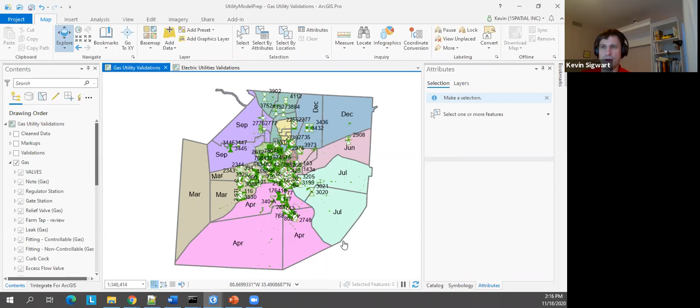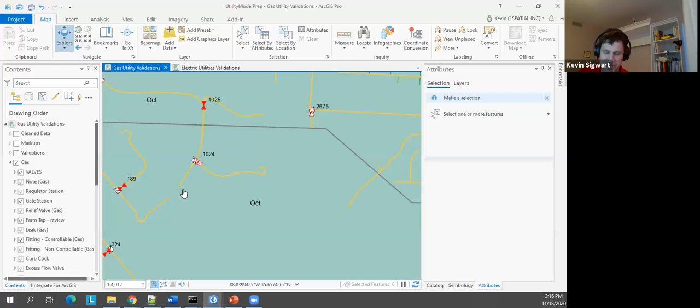So here I have a gas utility network, let's just zoom in so we can see what we're dealing with. And in here we have a series of gas lines and so forth. What we're finding is that this is symbolized based off of a set of interesting symbology that may be good for visualizing the data itself, but not very good for doing validation. So I'm going to flip this over to something that's a little easier to understand when we're doing the validation checks.

And what we're going to do is run a series of validation checks. Some of the checks we're going to check for is proper connectivity. We're going to look if there's any kinks in a network. We're going to make sure that our service lines are actually feeding out to those service points, and make sure that the relationship is that the service point is connected to the end of the line - not just that it's connected to the line, but connected to the very end of the line. So we can already see over here, here's an example where the service line is not connected to the meter itself.

So we're going to run it through a series of validation checks, and to do that, we're going to leverage the 1Integrate technology. So now I'm going to flip over to 1Integrate.

And here is our 1Integrate product. As I said, this is a server-based product that can either be installed on-prem or hosted in a cloud environment. The way that it works is you have an interface for building rules and running rules. It also has a REST API, so a lot of this occurs through automated processes - things kick it off and it just runs through.

So you may not necessarily work with the interface itself directly, except when you're just building out what types of validation checks you want to run. But all this can be also automated through a series using the REST API.

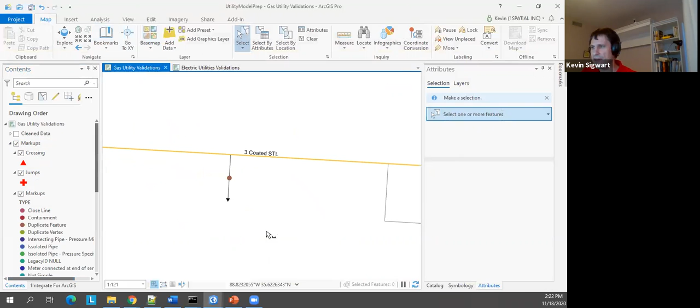If we come over here, here's where we're flagging this as a duplicate feature. I have 2 service lines that are the same geometry. Also, it has the same attribution too, so we can make it smarter than just the same geometry. We can also look at the attribution too.

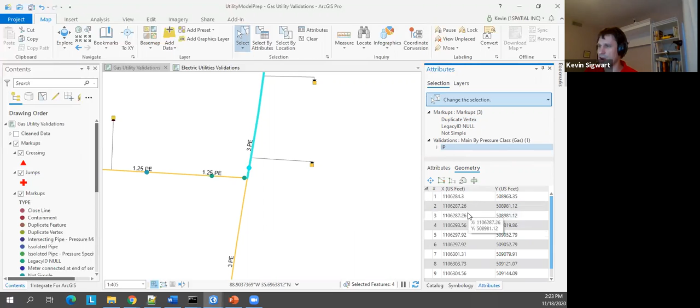Here we have an example where we have a duplicate vertice. So if I come in here and look at this geometry, I'm sure, oh, here we go, right here. Here's 2 vertices that are duplicate vertices.

We have spikes and kickbacks. I see this all over in GIS data, where there's these kickbacks and spikes and weird issues with the data as it's trying to maintain connectivity.

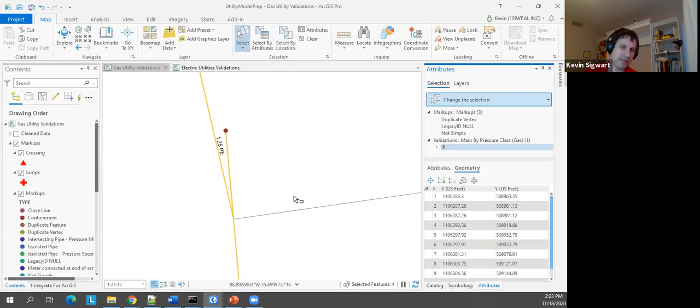This is going to wreak havoc if you have any sort of model, if you're trying to feed this into modeling software. Here's another example where we have a spike. And then here's just one other example where there's this weird spike occurring.

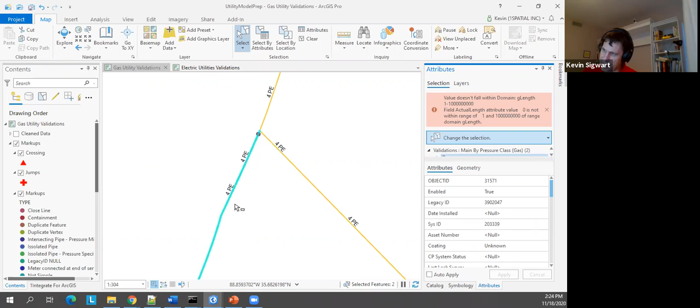We have features contained in other features. Here's another example. Okay, here I have two features. One feature goes to about here, and the other feature extends out, so one feature is contained in another feature.

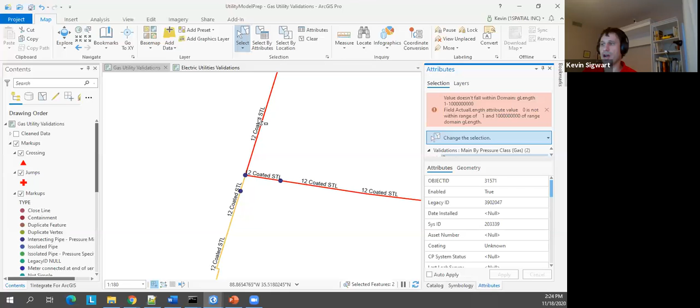Proper connectivity: here I have an undershoot, and here's another example of an undershoot. I also have pressure mismatches between connected pipes. Here we have an isolated pipe, because I'm looking at not just is the pipe connected to another pipeline, but is it connected to a pipe with the same pressure? In this case there's a mismatch, so it's a pipe that's isolated by itself.

Making sure we don't have orphan meters. So here's some orphan meters where it's not connected. I already mentioned this before, where it's not connected to the end of the line.

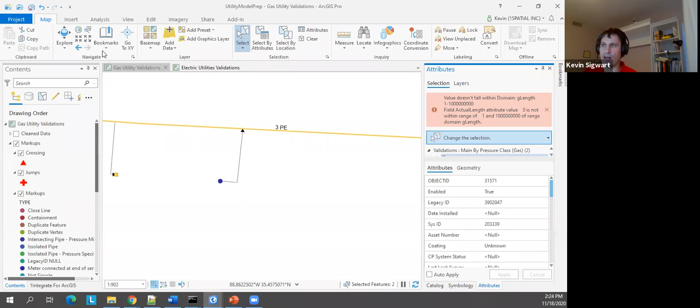Lastly, one of the other validation checks we've done is to check where my service lines cross over my pipes where they don't have a jump in them. Jumps are great when you're dealing with a paper map per se, but if you're trying to run this through some sort of analytic software, you're going to need to be able to handle it. So you need to identify where we have crossings where there is a jump, so it's not actually connected.

So maybe you want to change the Z value or something like that so they're not actually connected, versus where you have ones that are just crossing over. In the rules, we can write business rules to determine whether or not it's crossing with a jump. So here we have a cross with a jump, and this one is a straight line, so it's crossing over but it's not a jump. We can write some pretty complex business rules.

All of that was done, all those validations across this entire data set, were run in that short amount of time. But beyond just doing validation checks, we can also automate the cleanup.

So I'm going to go ahead and fire this off. Now we have business rules running that are going to do the automated cleanup. Just like we had the essential geometry checks, we have essential geometry fix-ups that can remove duplicate features, fix connectivity, things like that.

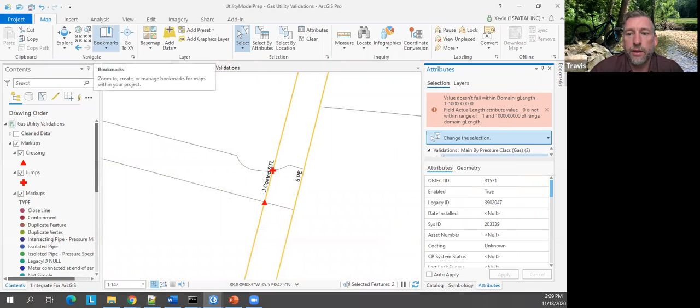And Kevin, there's no programming in any of the rules, right? No, everything you saw there is configurable in the interface. We're just using that GUI to define the business rules. Beyond that, this is also typically when organizations working with our software do training, so they learn how to write these business rules in the system and get up to speed to write their own business rules and maintain the system themselves.

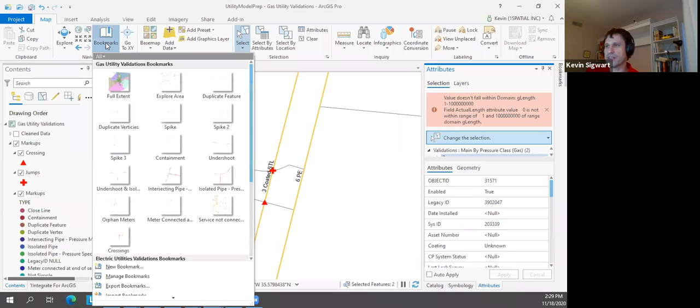So let's flip over to some of these example issues. Where we had the duplicate feature, this is a pretty simple one. When we clean it, that duplicate feature has been removed. We just remove it out. Pretty simple. Where it gets more interesting is dealing with these spikes.

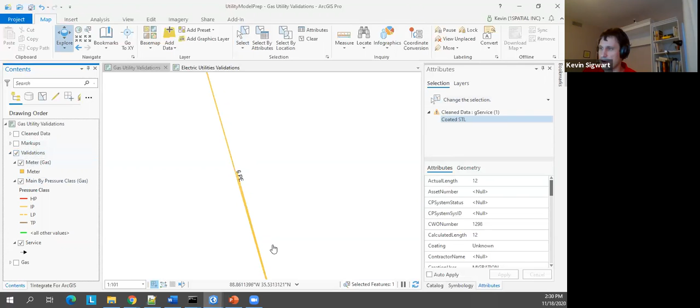So here I have a spike and I can clean that up where we remove that spike, but we're still maintaining the topology, so we have that proper connectivity when we remove that spike. Same thing for this one here - it's kind of hard to see when it's cleaned, right? Let's flip back over - that was the one I was just on. Let's go to this one. Here's another example. When we clean the data, it removed that spike.

And same thing for this particular example, where we had the weird kickback spike. We then fixed it, had proper connectivity. Where we had that overshoot or undershoot, in this case an undershoot - here we have that undershoot. When we fix it, it's now aligned.

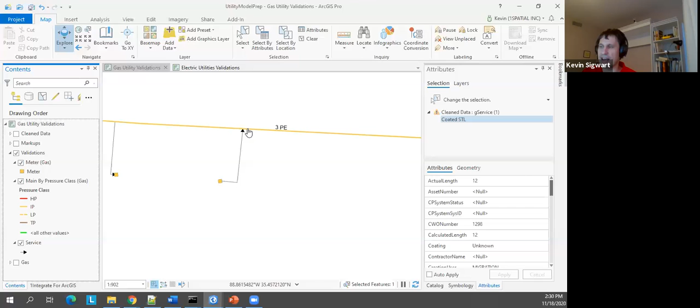And then if we're looking at those meters, originally it was connected to the start and not the end. We can flip that service line, and now we have that proper connectivity.

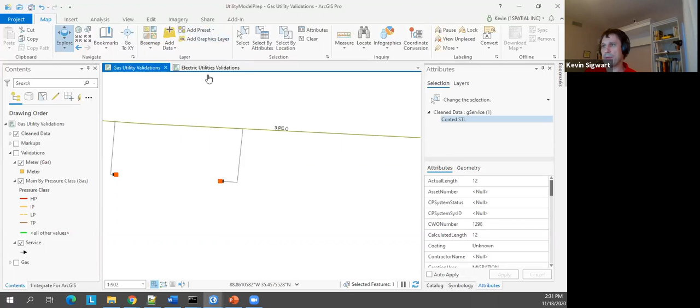I mentioned that we can write similar business rules for other types of data, whether it's electrical data or data for telco - Travis has mentioned it in the telco space, and what have you. A lot of times these business rules are similar because you're checking connectivity, whether it's an electrical line or a meter. It doesn't really matter, but it gets a little more complicated because the electrical network is a little bit more complicated. But we can write business rules against an electrical utility network.

So, for example, one of the validation checks we're doing is looking at an electrical network. We have above ground conductors, and we're saying that if there's an above ground conductor and any change in direction of the conductor, there must be a pole at that location. We can see here that we have pole data, and all of a sudden we're missing a pole at this particular location. So we can flag this feature saying it's missing a pole, and we either need a pole here or this network should be connected differently, because you can't have something above ground where there's not a pole.

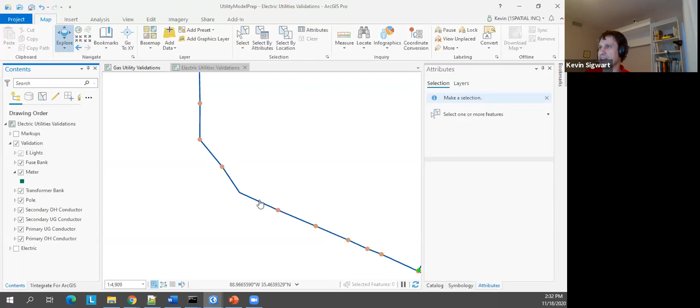So those are the types of validation checks - we can write some pretty complex validation checks when going through this. Let me go back to my slides. So we talked about doing validation checks on gas. We can also do it on electric. I didn't go through every single validation check - it starts to get repetitive when we go through every single one. But we could write validation checks on the electrical data just like we did for the gas data, specific to whatever your business needs are.

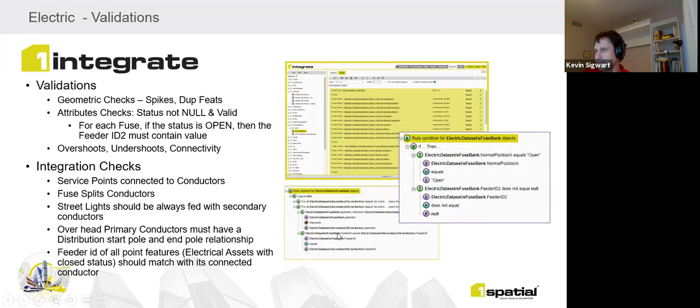This is all leveraging our OneIntegrate technology, and as I mentioned before, we are data agnostic. We can bring in data sets from Oracle, file geodatabases, shapefiles. We're also partnered with Safe Software, where we can connect into anything that FME can read, leveraging their API. So this is where we can start connecting into CAD drawings and Esri geodatabases and so forth, and bring them all into the engine and write validation checks across all those different data sets. We also have an application called the One Data Gateway, a submission portal where you can collect data from data providers that are providing you data.

Travis mentioned the work we're doing at Google, where they have contractors building out CAD drawings of floor plans. In order to integrate that data into their asset management system, it needs to go through a series of workflows. So we provide an application as a front-end interface where they can drag and drop their data set in. It runs through validation checks and gives them a report on how well the data meets the business needs. This way, Google can say we won't accept your deliverable until it meets these requirements. This could be for CAD data, GIS data, or even non-spatial data like spreadsheets - it can be written for any of those purposes.

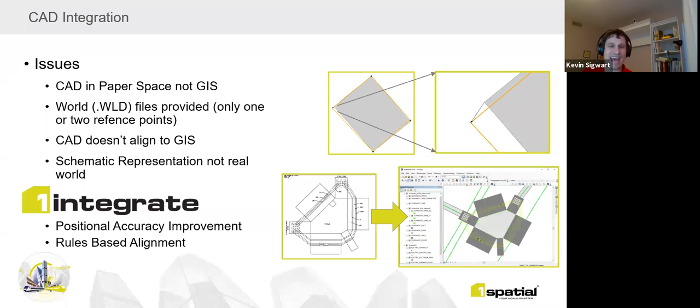Let's take a look at what we're trying to do, and then I'll walk you through the process. Here we have a CAD drawing of an electrical manhole, and we need to get this drawing into the GIS location. This client wanted to trace the feeder line all the way from the beginning through the network. In order to do that, they needed to pull information from the manhole to determine where the feeder lines were going inside it, and how many times it wraps around the manhole itself. In the drawing, we have an identifying number, 1564.

Luckily in the GIS we also have that identifying information, so I know that this particular vault is where this drawing needs to be migrated into. Leveraging OneIntegrate, we can get the data shifted over to that location, but notice this particular drawing isn't rotated to due north. So another thing we need to do is rotate it around to determine the best fit, and we can do that leveraging the engine.

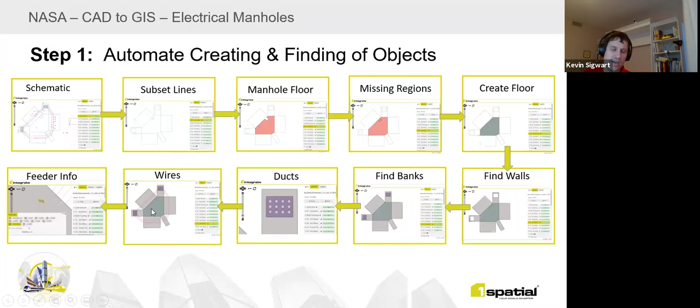Let me go back to my slides and walk you through the steps, then I'll show you inside OneIntegrate how we're doing it. First, since this is a dumb CAD drawing, we need to identify the objects in the schematic drawing in order to determine how to get that data shifted into the GIS. Leveraging OneIntegrate, we can look at the topological relationships and infer what all these objects are - identifying the floor, which is important for shifting, scaling, and rotating. Then we find all the other objects, but besides the floor, the most important are the actual wires, because that's where the feeder information is to determine how the feeder lines move through the network.

Once we identify the objects, we can shift it so it's generally in the area, then rotate it around until we determine the best fit, running through a series of validation checks as we're shifting it to validate where we have that best shifting information. Once we have that shifting variable, we apply it to all the objects, and now we've shifted, scaled, and rotated the drawing so the schematic drawing is in geospatial space.

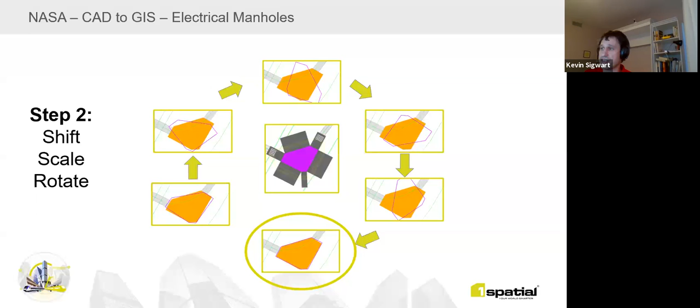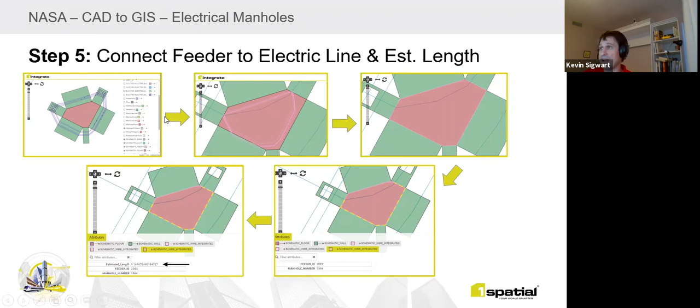But it's still a schematic representation, so we've got to turn that into a GIS representation. We're going to connect our wires and add our splices, then conflate the feeder ID onto the actual network, and then move this into geospatial space. All this leveraging a rules-based approach so it can be automated, so we can apply those same rules to all the drawings.

When I did this for this particular client, we did it on one particular drawing. We then ran it through all the other drawings, and it didn't work the first time. I realized I wasn't taking certain things into consideration, so I had to tweak the rules a little bit more. Then I ran it through all the drawings, and all but 2 came through.

The reason 2 of the drawings didn't come through is there were some data quality issues with the drawing itself that needed to be addressed. So we would first do that data quality assessment on the drawings. If they meet those business needs, it can go straight into this automated process. Otherwise, there may need to be some manual intervention to fix something in the drawing so it can be migrated into the GIS.

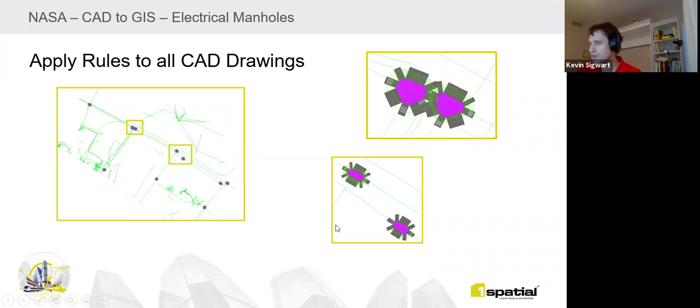And then lastly, once we have it all in, we can actually build out those connected feeder lines from start to finish, because we can now trace that along the entire network.

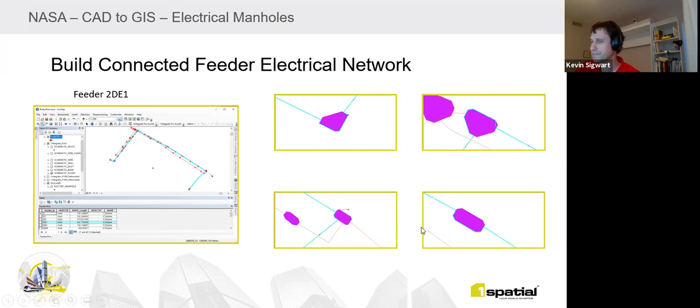So real quick, let's see here. I'm going to come back to 1Integrate, and let me go to my NASA example.

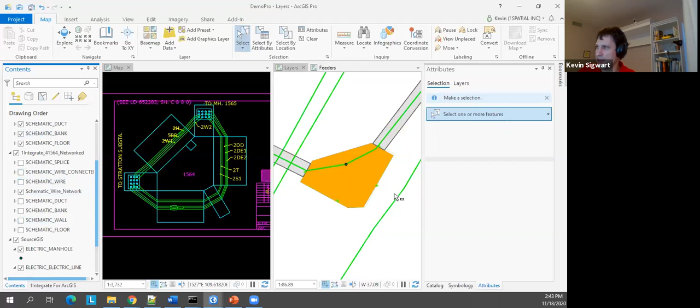And then we're also building the wire in so that it's actually connected over here. Let me actually do this. Okay, here we go—we're connecting the wire in there. Let me turn. So we have that wire now that we've identified, connected into the network itself, and we've applied this to the entire network so we can trace those feeder lines along the network itself.